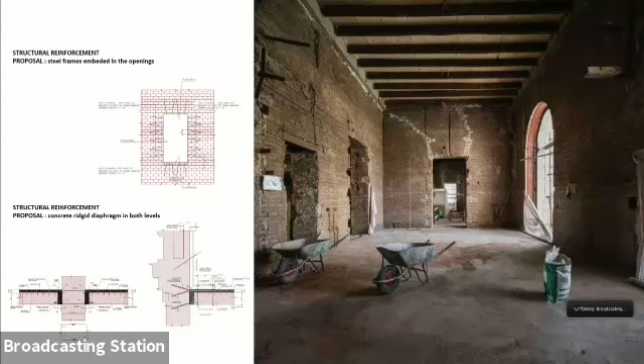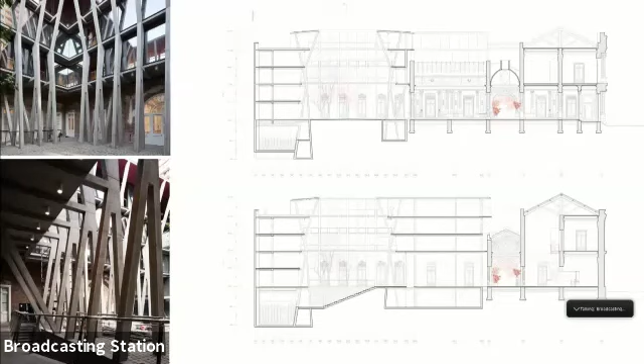This strategy allowed us not only to define the character of the new building in its relation with the pre-existing, but also to solve the different structural requirements posed by the relationship between old and new, through pragmatic variation in the geometry of the structural elements. In this building, the structure drawn in space revealed the stresses of the structure, making the management of these stresses the core of the project's perception. The exposed structure creates episodes and rhythm which constitute the project's heartbeat. From the point of view of perception, the emphasis is on the function.

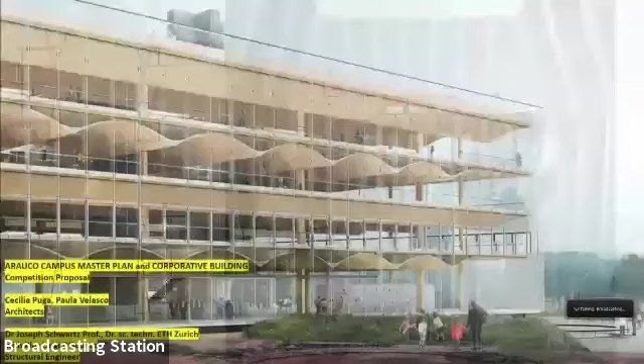The project, developed together with Paula Velasco, Joseph Schwartz, and Pierluigi D'Appunto in 2019 for the Empresas Arauco headquarter competition, sought to achieve clean and calm surfaces in wood, and a very transparent and light new type of architecture, helped by the precision of prefabrication methods in wood construction.

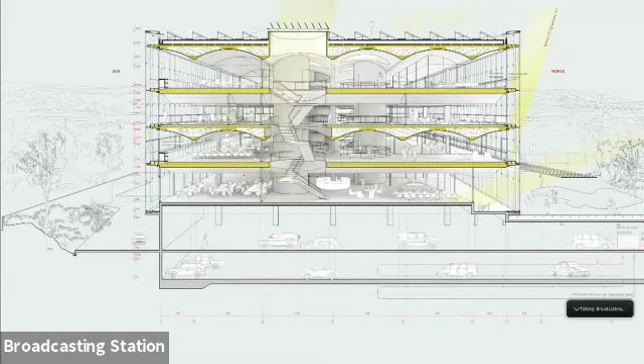We conceived a system solved by a single constructive component: the structure, the floor, the ceiling, and the spaces for the distribution network of the facility inside the building, expanding the range of flexibility for the organization of the plan.

The supporting structure consists of a system of columns and wooden slabs composed by unidirectional strips with a hollow cross-section of almost triangular shape, being supported by solid columns made of laminated wood.

The slab elements are assembled using post-tension cable linked to the wooden element located at the top or bottom of the beams. The change of direction of the beam by 90 degrees from one floor to the other allowed each beam to be supported every 18 meters through columns and vertical cables.

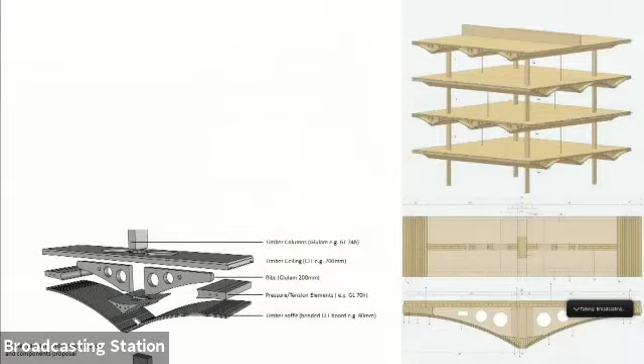The reinforced concrete cores are activated to resist wind and earthquake, as well as other sources of lateral load. From its synthetic nature, the structure of this proposal embodies much more than the mere solution of load transmission or the stability of the building.

Rather, it brought together in its own reality the material, atmospheric, and orderly dimension of the project, while enhancing its performative capacity. At first glance, it appears to be a concealed structure. However, it is very much exposed—everything you see in the building is structure.

Every surface that makes up the space is both architecture and structure. Floors and ceilings are two sides of the same component, precisely designed and calculated to meet architectural and structural requirements simultaneously and as efficiently as possible. Nothing is surplus, everything is bone.

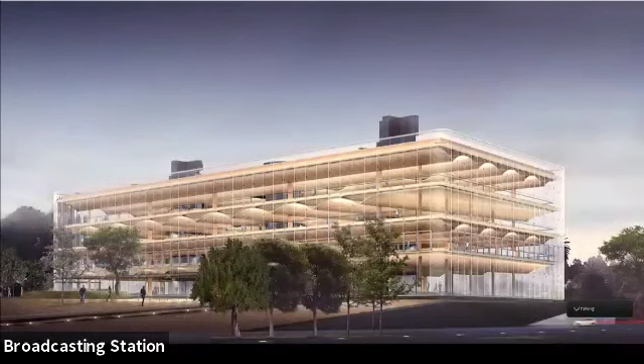Okay, thank you, Cecilia. So maybe we can just look at this slide. What Aurelio just mentioned is the thing with the mystery—you can feel the structure in the inside renderings, but you don't really understand how it works. The first project, the ministry in Santiago de Chile, is completely different: architecture is structure in the courtyard, it's completely the same. So what are the reasons for these two completely different approaches?

We always try to imagine what the character, the experience we want to build in our project will be. So we start defining the structure by defining the ambience, the atmospheric quality of the spaces, and then we go through the different solutions possible to build that.

I have to say that in my country, where these two projects were designed, regulations still allow us to build with a single layer of architecture and structure, which is something quite special. Still, I think things will change.

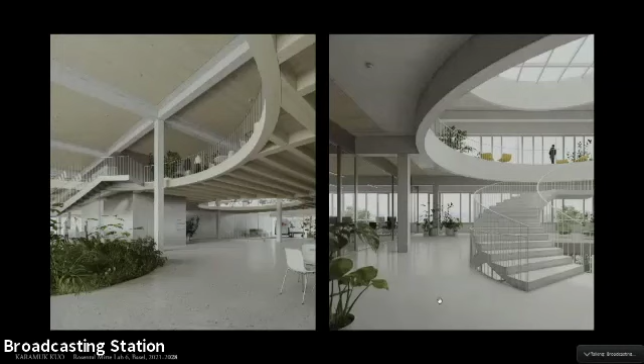So in each case, these were conscious choices, conscious choices to serve multiple purposes. And for us, in the end, maybe just to conclude, the collaboration with the engineer, in some ways, you could say is like a jazz set.

Sure, very often we as architects, because it's a building, we take the lead, since we're also coordinating all the other consultants, all the people that come to the table for this conversation. We keep the kind of overall vision of the project, but it really is also a jam session. We're brainstorming, we're throwing ideas to each other, and we're rethinking each in our own disciplines, but trying to make a better whole.

It's never really about the most efficient or the most pure solution, nor is it about the most flamboyant solution. Exposing or concealing is also always part of that game, but it's almost always about a conceptual economy of means, a way in which the architectural and the structural ideas align to produce a holistic solution. Thank you very much.

Okay, thank you, Jeannette. So it would have been interesting if you put Mies van der Rohe and Gaudi in one room and they had to design a building together. So what do you think? What does this look like, or what would this look like?

Well, I think it's funny because if you were to ask me where I would position myself on that spectrum, probably I would land somewhere in that middle. This was referenced in a way with what Cecilia and also what Christian was saying before, that to a certain degree, the ambiguity sometimes is what makes it interesting.

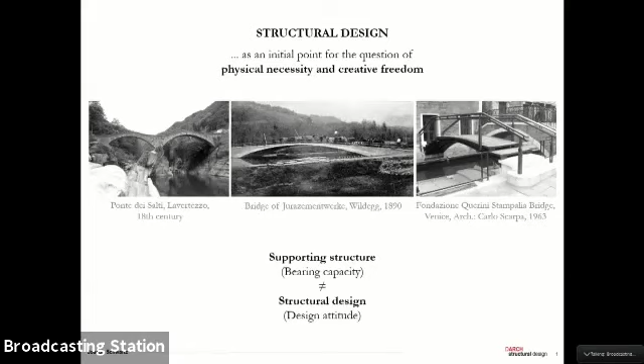But nevertheless, very strongly informed by the stone bridge in the sense of the arch. Then the third bridge of Carlo Scarpa, a reinterpretation of the classical bridges in Venice with totally different materials, totally different tectonics - three ways of designing a bridge. And it's clear that if you're looking at these three bridges, structural design, as mentioned before, has a lot to do with decisions, a lot to do with an attitude.

And this is what structural design is, not the other way around - a supporting structure, bearing capacity, and so on. In this sense, it's not possible by calculation, by any analytical methods, to find out which system makes sense or which doesn't make sense in a given situation.

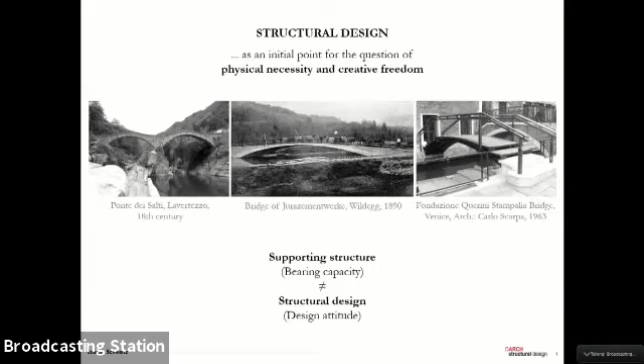Nevertheless, all three arch bridges are under the conditions of this physical necessity, on the one hand, more looking at the work of the civil engineer, and the creative freedom on the other hand, looking at the way of working of the architect.

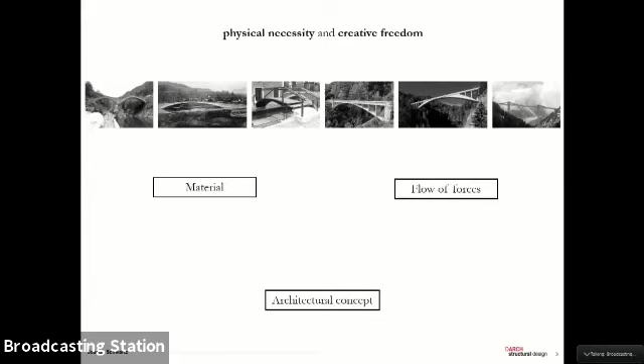From our point of view, we have these very important elements we also mentioned several times this morning: on the one hand, the tectonics of load bearing, on the other hand, the tectonics of joining, and then the architectural concepts. All these different bridges are strongly driven by these different aspects, and it's the interaction of these three aspects that are, at the end, the spirit of structural design.

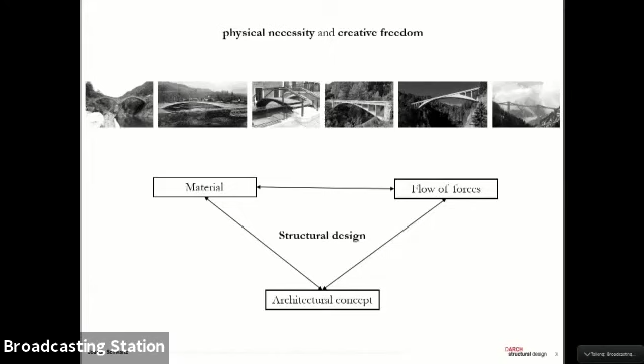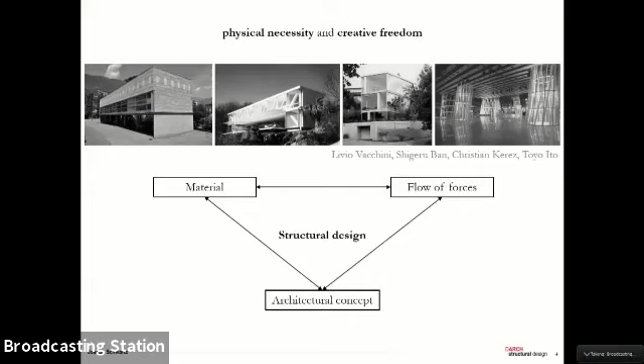This is clearly not only the case for bridges, but it's exactly the same for buildings. Also there we have the material, we have the flow of forces, we have the architectural concept, and it's the interaction of these three elements that at the end defines, in our sense, structural design.

But it's a totally different expression of the structure. That means, at the end, looking from the side of the civil engineer, it's clearly not possible by mathematical optimization to find out which structure is perhaps more reasonable than another one. That means experience and also intuition play a very important role.

And in this sense, I like very much this quote of Eugène Freyssinet, coming back to intuition: 'There exists, to my mind, only two sources of information: direct perception of the facts, and the intuition through which I perceive the expression and the synthesis of all the experience accumulated throughout life.'

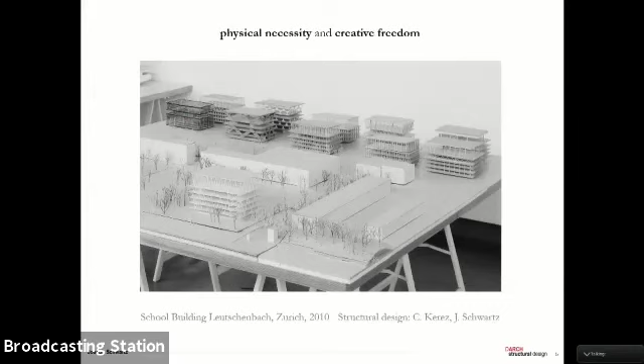Yes, it comes back to a question asked at the very beginning. This way of looking at internal forces on different levels, or hiding or exposing them on different levels, applies even for people who understand much more about structures. You can hide a structure by cladding it, but you can also hide it by relating it to spaces so it's not understandable at first view. For people not trained in structural design, at the end it's only intuition that allows them to understand how such a bridge is working.